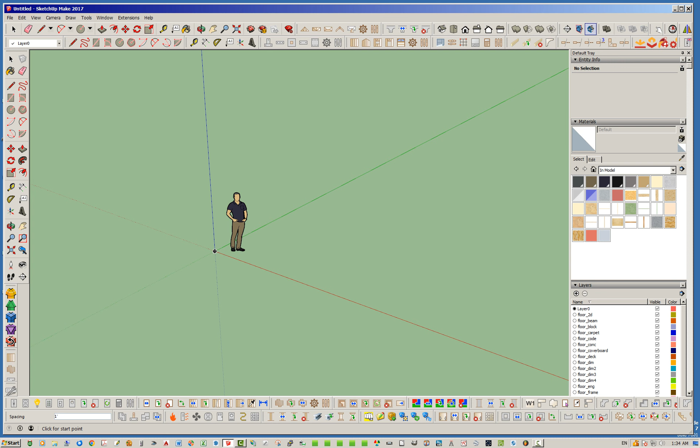Let's jump back over to SketchUp, and I'm just going to go ahead and throw it on a grid with the Project Plugins Grid tool. So I'll just do that real quick here. Okay, and I'm going to just draw a quick floor. So let's see here. Just leave it at the defaults. I have the sheathing turned off so we can see all the joists and stuff. That's fine. I'm just going to make this, I don't know, 24 by 28 is fine, just something simple here.

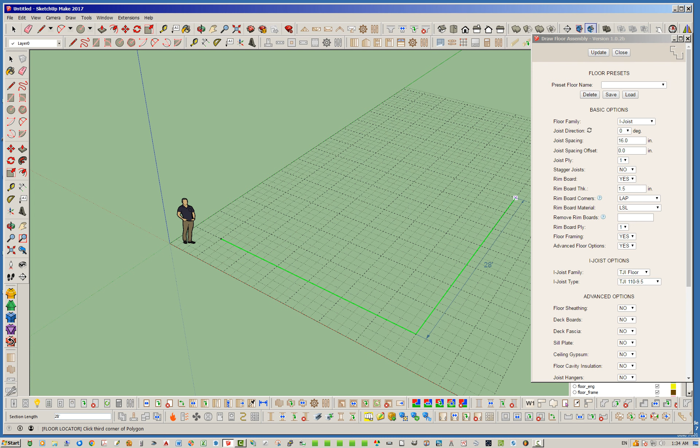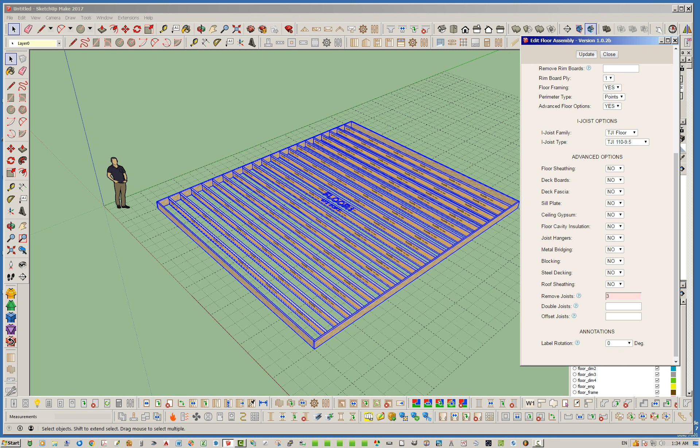Okay, so here we go. We got a typical I-joist floor. So if you go in and edit this floor, as I've shown before in other videos, we can go here to remove joists, and let's go ahead and remove the 3rd joist. So I'll go ahead and hit update there, and you see that disappears.

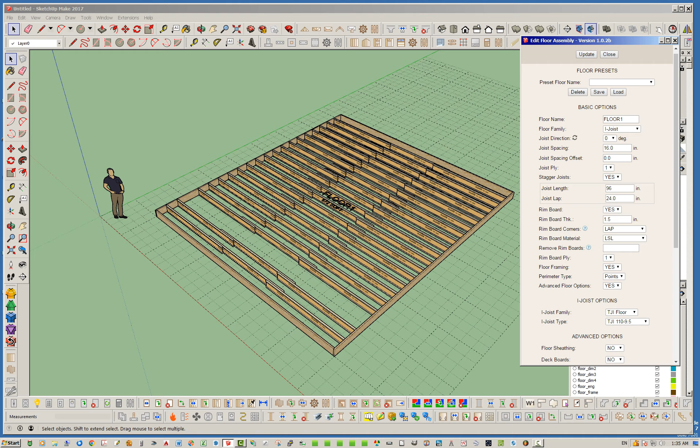So what I've actually added in is one additional thing with removing joists, and that gives you a little bit more granular control. If we stagger these joists now, I'm going to put them every 8 feet, for instance, a little short, but that's fine. So that'll create a staggered joist situation as shown here now. So we've got a 24-inch overlap with an 8-foot max joist length.

So as you can see, it's taken care of that third line of joists and removed it as we had previously specified. But now there will be situations where you may want to remove just one specific joist out of one of these lines. So let's go and take a look at this and see if we can do that.

Let's try removing from the 6th line here. So that's 3, 4, 5, 6, and let's just start with 6. So it'll take care of all the joists that are in that 6th line or 6th row. But let's say we want to remove the 2nd joist from the 6th line. The way to do that, and I kind of feel like this is backwards with the way I have these numbering set up, but I may get some more feedback on that.

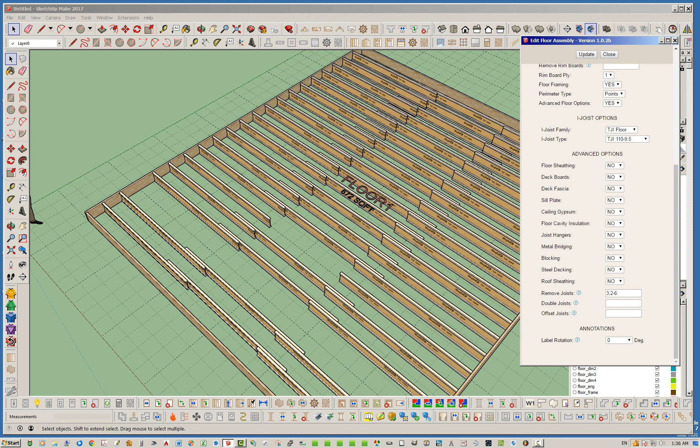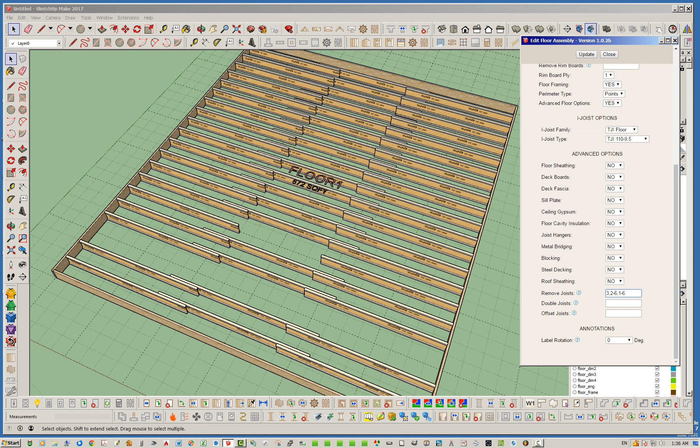So you can see what I've done here. I've put in 2-6. What that's saying is, in the 6th row, the 2nd joist, and we're coming from the left. That's always the starting point. Remove the 2nd joist in the 6th row. And of course we could remove any one of these. We could say let's remove the 1st and the 2nd joist in the 6th row, and we'd separate them by commas. So let's go ahead and do that.

So you can see we can be very selective here. We can essentially remove any one of these joists in this staggered array of joists that we like using this methodology, which gives you some very granular control. Now, people ask, why would you want to remove a joist out of the middle of things? That's a good question, and there is a reason for this.

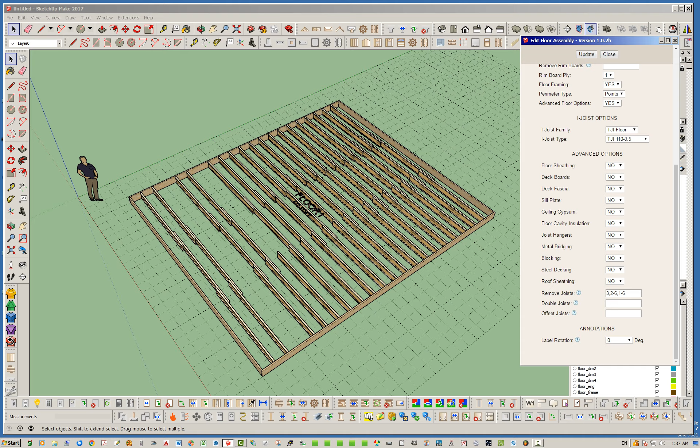Just recently, a user showed me an L-shaped plan, and you end up with some tails left over from these cut joists where you have an L-shaped floor plan. Those are not needed, and this allows you now to remove those. So it gives you further granularity as far as controlling what joists you want to remove, specifically for removing joists within a staggered joist array like this. Okay, I think that's pretty much it.

Again, I've been putting out a lot of little updates on the floor plugin and also updates with the opening tool, and we've still got a few more to bring on. Sometimes I bring out these updates probably quicker than I should, but it's a matter of expediency, and different users have different requests, and I want to get those out to them as quickly as possible so they can complete their projects.